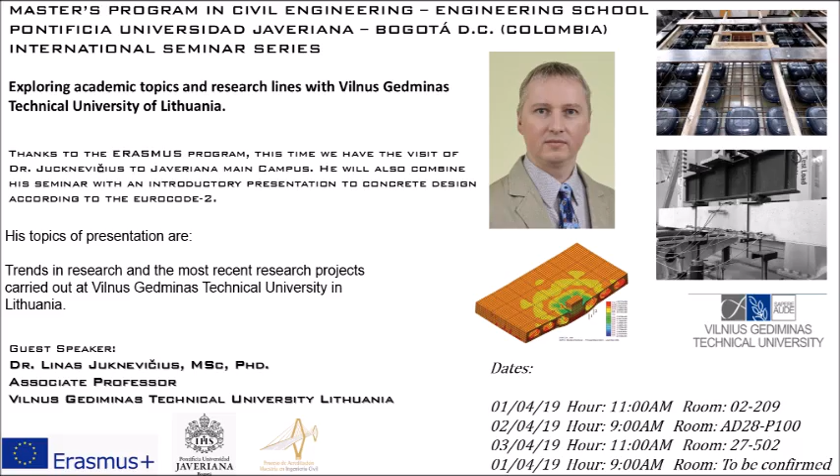It is recording, so you can start whenever you want. Okay, and I can show the information about the faculty, then I can show this. Okay, that's very good, that's very good.

Do you have any presenter or not? I can just click it here. Oh, let me see if it's in the backpack. I think it should be here still, unless Mateo likes to play with it. Maybe it's home, I think it's home. Okay, yeah, he recognizes that thing. Right.

So, shall I start? Yes. We have people online, so I think it's for them right now.

Okay, so well guys, nice to see you. I came from Lithuania, a small country. I will show you later some information about my country, but I also would like to present the faculty, what we are doing there.

Are you the students of civil engineering? Okay, see.

Yes, I know these words, not so much, maybe 10 words in Spanish. Sí, cerveza, baños. Baños, it's so important. It's enough to survive, right.

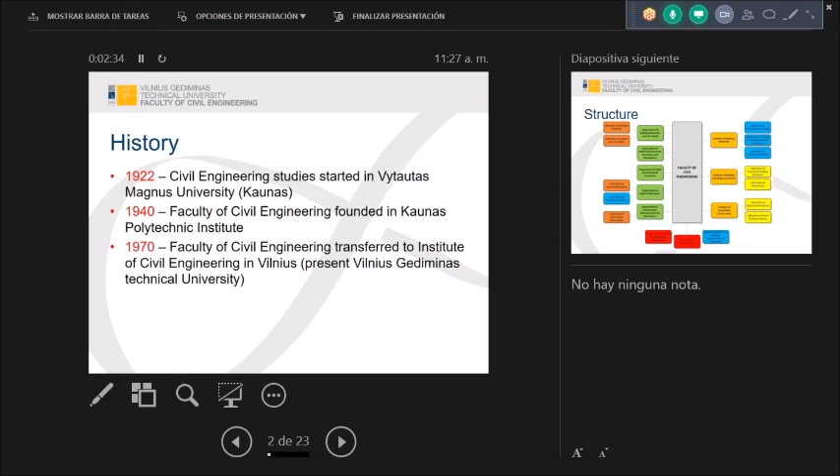Now we do it in another way. Now we have big universities with a wide scope. So for the structure, maybe you can see it there. You don't have to care too much about the internal structure, but this is how we do it in our country. We have university, then we have faculties. We have 10 faculties in the university, and each faculty has a department, a specific department.

In our case, we have department of building materials and fire safety, department of reinforced concrete structures and geotechnics - this is the one I'm representing myself, so I know something about reinforced concrete. Other fields are not so familiar to me. There's the department of steel and composite structures, department of applied mechanics, and construction management and real estate.

So today we have 5 departments working in slightly different fields. And we have some so-called institutes inside the faculty - Institute of Building Materials, Bridge Structures, and Sustainable Construction. These institutes don't have students, they have researchers, so they are pure researchers. They have research laboratories and do pure science.

Do they work directly with industry? Yes, if the industry has any projects or any problem to solve, they address the university, the faculty, according to the field of interest, and then we try to lead them to one of the institutes or departments.

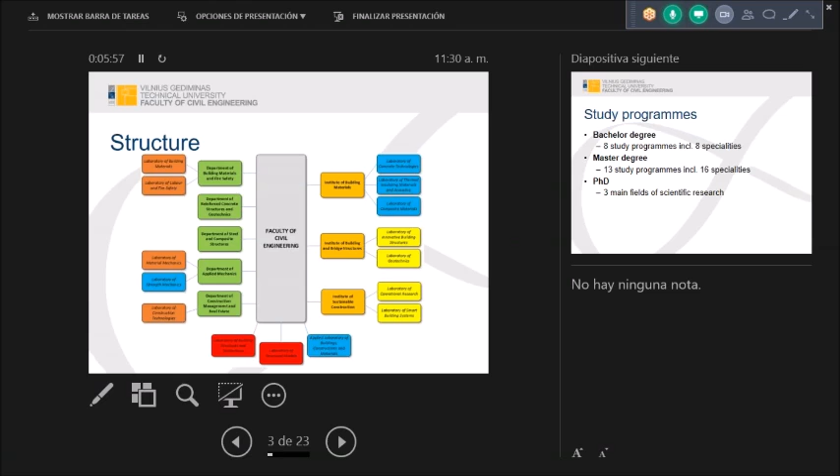Science gets too far away from the problems we have every day.

Yes, exactly. So that's always changing, but generally we have approximately 8 study programs for the bachelor's - this is undergrad - and master's degree, more specific. So I don't know what's your time schedule, but we have 4 years plus 2 years plus 4 years.

It used to be 5 years in the bachelor's, but right now they are doing a change to 4 years, because it's a common trend worldwide to shorten the program into 4 years. I can say we have a problem - there is another trend. In our case, it lasted more than 10 years to have 4 years, and now there is a big push from the industry to make it 3 years.

Really? Yes, but then they said we agreed to make it in 3 years, but then bachelors won't have any right to do any certified work - they have to finish a master as mandatory. So we said that from the point of view of the university, it's impossible to make an engineer in 3 years, no way, that's impossible. We have to have 4 years at least, and this is not a full engineer unless you come to the master. So now it's 6 years, but we agreed to make it 3.5 and 1.5, or 3 plus 2, or any other combination, but we need those 5 years.

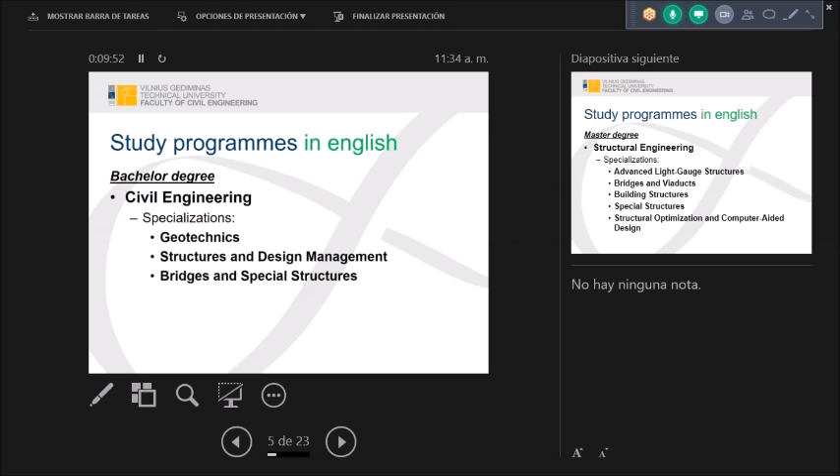Geodesy also, yes. So we are artificially split. Now we become smaller, and I know our bosses in university have a plan to join us together again. So it's a living thing - some bosses think that by changing the structure you can improve things. Personally I don't believe in this - the people can do the change, not the organizational structure. Yes, in every university, yes.

And for the master's, by the way, this is what I'm telling you - it's pure in English, so you are all welcome. If you know the English language, you can come to us and study. So for structural engineering, our core program, it's full in English from day one, all the courses - even the undergrads. Yes, undergrads and postgrads, till the doctoral studies. Wow, so we are really international. Yeah, and we have this full-English undergrad program for more than 15 years now.

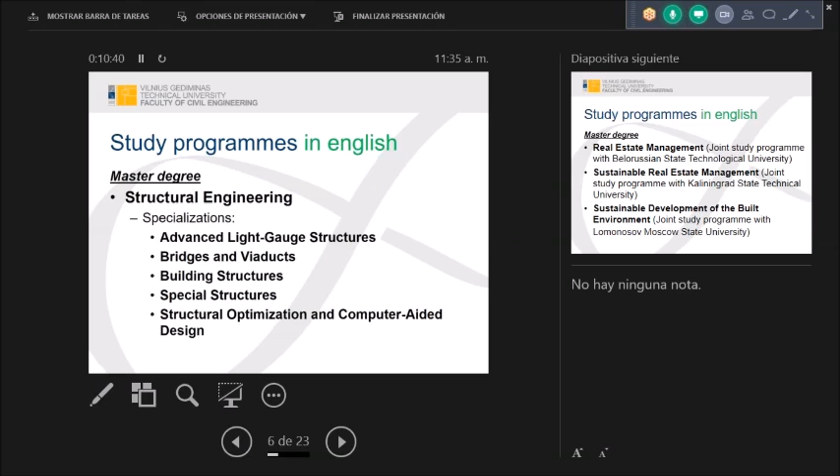Wow. Because we had students from Lebanon and countries like this some time ago - I don't know why, it's very interesting. I mean, that's one of the main problems we have right now with our programs - we cannot really offer more than a couple of courses fully in English.

Yeah, but in our case it's very flexible since we offer a full program, so mobility students or teachers can join almost at any time. Yes, you just have to check whether it's spring or autumn semester. So from the 1st of September till Christmas, or from the 1st of February till June - these are our semesters, so you can join at any time, and they have full English. We also have some programs that join Belarusian and Russian universities.

They are not very popular - we thought we would get more students, but not so. I know about Kaliningrad - yes, this is an exclave. So we don't have any border with Russia, we only have one with this Kaliningrad state.

So that's for the numbers in the faculty. My faculty of civil engineering has approximately 1,000 students for the bachelor's and 400 for the master's, and we usually have approximately 45 PhDs. This is big. For the graduates, more or less, the numbers are decreasing unfortunately, but we still have a big enough body to run our studies.

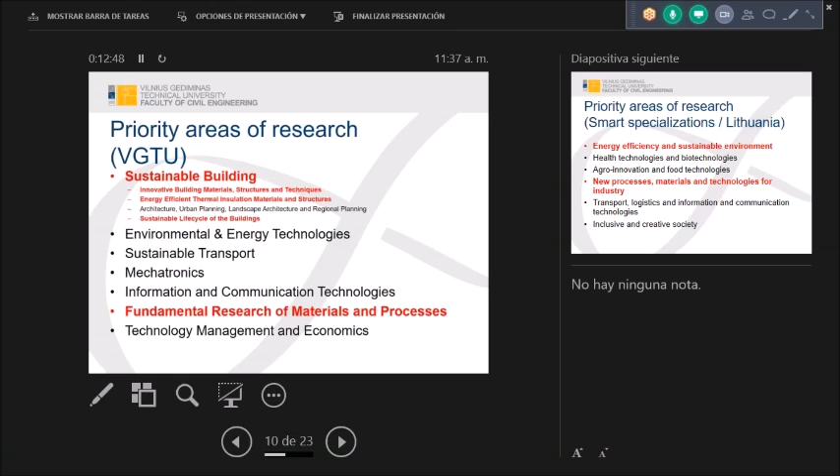Okay, maybe I shouldn't dwell too much on this. Of course, we have some university priority research fields, covering what we call sustainable building, and some fundamental research. Other topics are covered by other bodies. There's also so-called smart specialization - when you want to apply for funds from government institutes, you have to show you're in line with certain priorities. These are set for 5 or 10 years, and then you can get funds. They are quite wide, like energy efficiency - those are the problems we're facing right now. These two are directly related to our field.

What is the main product of production in the agro-industry field in Lithuania? Well, we produce all kinds of corn. Also there is a lot of farming, like cattle, milk, pigs. I'm not very good in this agro-economy, but I know these are the national products - we have potatoes, corn. I don't know the English names of all those things.

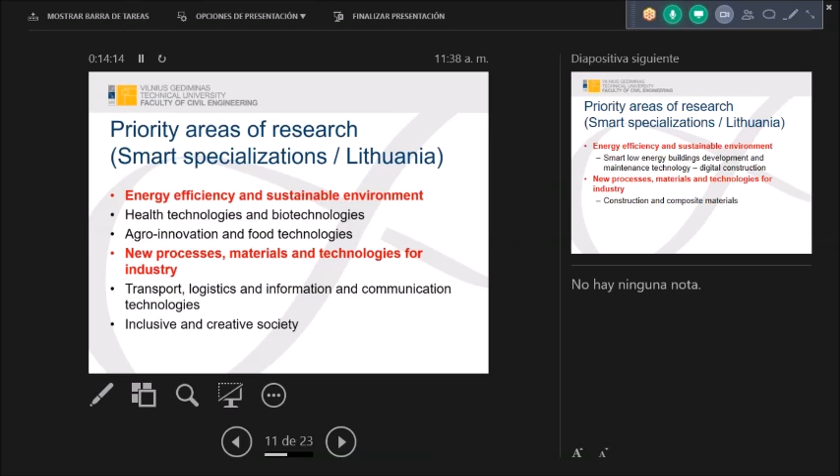It's all right, it's very similar to what we have - pretty much the same. Carrots, and we have a little bit of rice. We don't have rice. Okay, so that's what we are importing - we're a small country, so we import most things. There's just a continuous list.

This is a European program, a big one. It's almost impossible to do it alone, so we have to collaborate - this is the reason why we try to be so international. If you want to apply for projects like Horizon 2020, this European funding, it's again very general, but you have to find specific calls for the project and apply. These projects are millions of euros each. You have to be big enough by yourself, or get partners like Cambridge University or other big universities - then you can become a partner, so it's not easy to take the lead.

Because we are just too small - our turnover is something like 50 million euros for the whole university, so it's considered too small a number to run a project worth 10 million euros. They said we don't have enough management capacity and experience, so you have to find the big guy who takes most of the money. Still, it's a lot of money - those projects are very interesting.

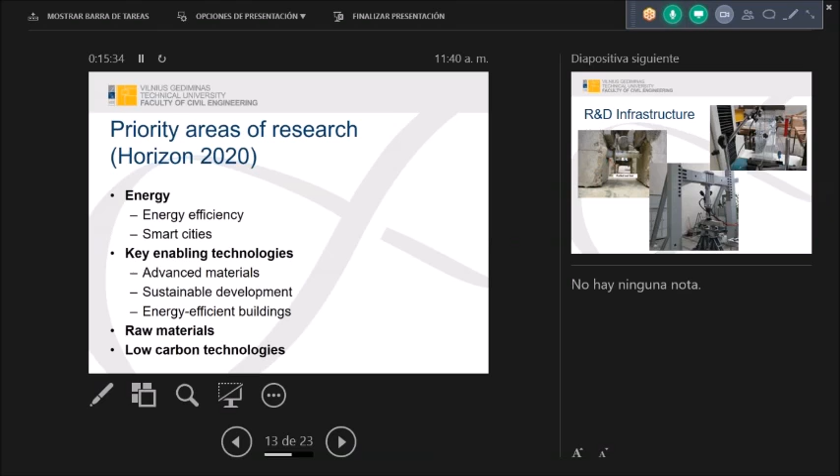And just some pictures from our laboratories - this, by the way, is one of the non-metallic reinforcements. We do a lot of tests, like pulling and so on. This is now our main beam test setup - this is a universal machine, we can do any setup, I showed a lot of features.

I can show it also today, with the testing of the slabs - this is the sleeper test, I showed it two days ago so I'll just show it now, that's for train tracks. So they are really universal, they can apply static and dynamic loads, and they are fully computer controlled. We have horizontal actuators so they can test structures up to, I think, 20 meters - that's a long span, a very long span. They can test real size, real scale specimens.

That over there, is that glass? Yes, that's glass, because we have one department for steel and composite structures. They work with timber and glass and all the glued things. Very interesting.

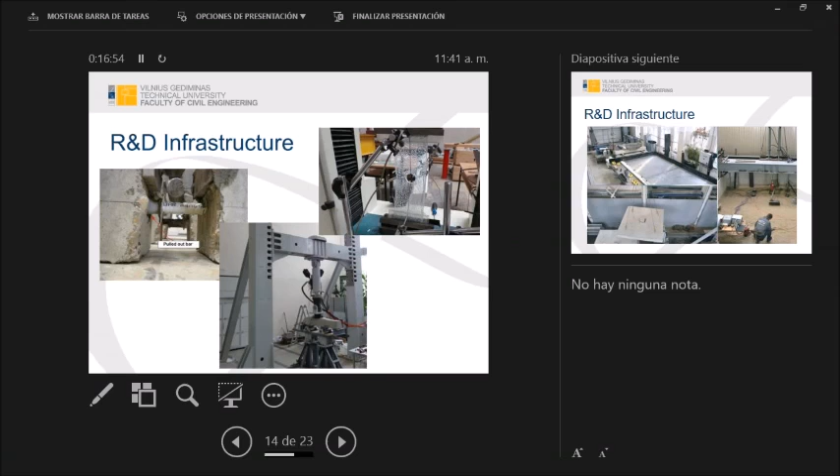Structural glass has become very popular as a structural material. Now we sometimes make facades where the glass itself is structural. It has a load-bearing capacity instead of just hanging there. That's another picture.

So we have two big fields, like playgrounds, one to prepare the specimens. We have a huge formwork with a magnetic formwork system. So as a scientist, you can make a drawing for the slab or beam of whatever sizes, and you can do it.

Here is a vibrating table, so you can put the reinforcement and make real scale big slabs or big beams for testing. I don't know the exact dimensions, but it's something like 8 meters by 4 meters for the big one.

So we have an industry-level laboratory. We have one big building, like a factory, which was built exactly for the laboratory's purpose. So that's the slab area, and we have a crane so we can move things around the laboratories. And this is the geotechnical lab, also very nice infrastructure.

They have a test playground for the foundations, I think 8 meters deep, so they can control the water levels and pressure at different depths.

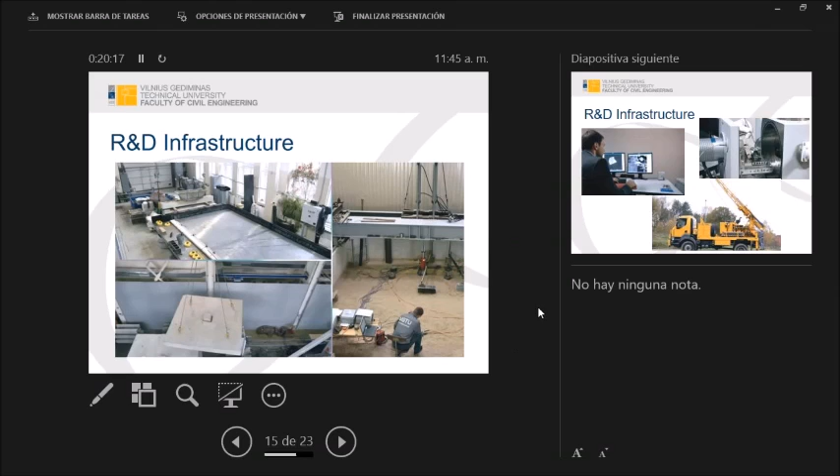That's right. Sorry, I passed over something again on the other topic. Yeah, it's ready. So we can actually work from the macro scale to the very micro scale.

We have an electronic microscope, so we can check all the properties of the soil by analyzing the small grains and how they work together. We also have testing machines that drill the test samples. That's unique, there are all kinds of infrastructure available.

Related to civil engineering, because we had a major investment some time ago, 7 or 8 years back. We got a big project sponsored by the European Union, so we invested almost 10 million euros just to buy the best new equipment available worldwide.

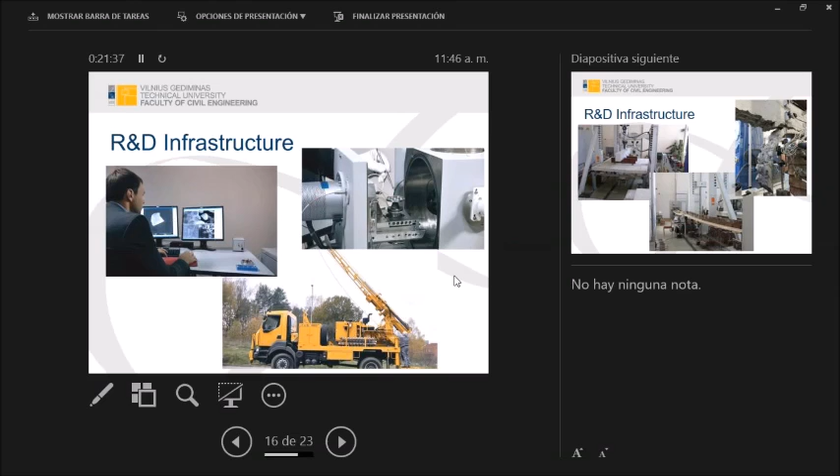So far we're very good, of course, but we have other problems. We don't have enough running costs. This machinery costs money to maintain, and I don't know what will happen in the next 10 or 20 years, because the maintenance and even the accreditation testing to prove the machines show the right numbers costs thousands of euros every year. Well, but we hope to manage it.

That's another picture, some tests of the cables for supported bridges, and you see this external reinforcement, fiber-reinforced plates that are attached to the slab. So this is just a picture showing what we do with our infrastructure.

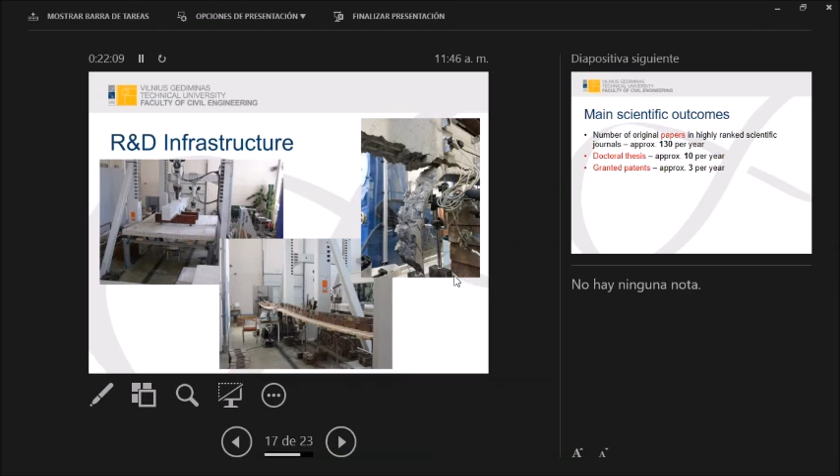Very shortly, we produce a lot of papers, because even our salary depends on the papers. If you want extra, there are about 3 patents per year, mostly national patents.

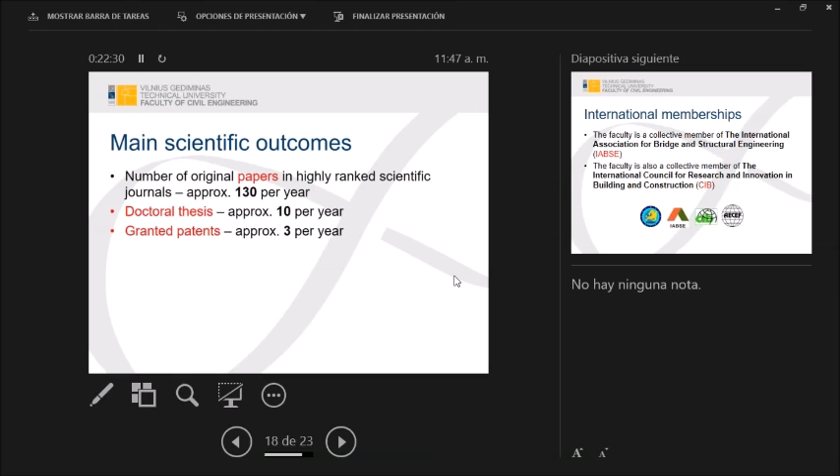So for the patents, I have a special opinion. Unless the patent is bought by a company, they are worthless. You just have to pay for it, so I don't like it.

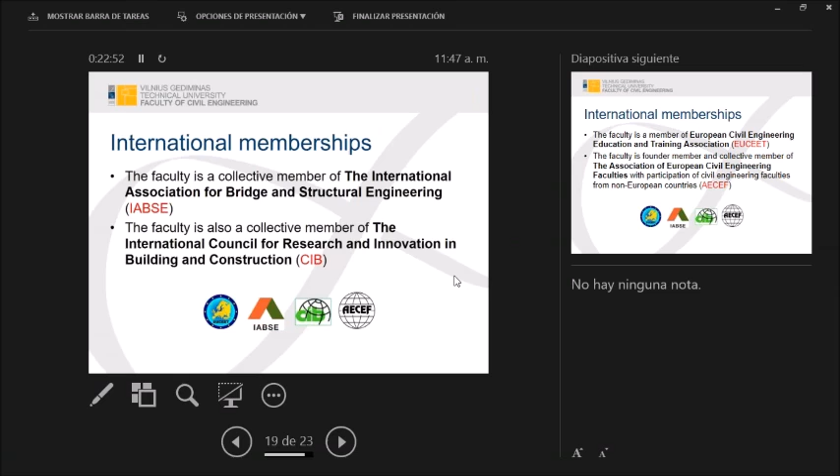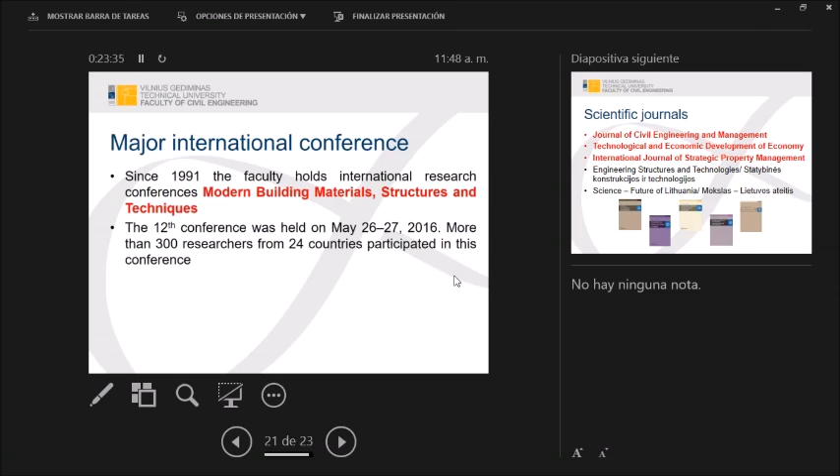We have one big international conference, and one of them will be held in 2 months. I'm responsible for this conference, so you are very welcome to come. It's held every 3 years, so in the next 3 years, if nothing changes, we will organize it again.

We also have scientific journals, and three of them are listed in the Web of Science database, so they are very popular there. My personal opinion, which is not so popular, is that scientists write a lot of papers now, but nobody reads them. That's a problem.

Okay, thanks for this presentation on the faculty. Professor, the room is yours, you can do as much as you want. So just tell me when I have to stop. We have 10 minutes still, Professor. No worries.

Well, I'm impressed by the 3-year span they are trying to do on the undergrad level courses and programs. We try to resist it, we're trying to resist it, but I don't know if we will succeed. Okay, let me do this. This is new, show me how to do this. Okay, that's new, I didn't know it. Maybe it's a duplicate.

Excuse me, I have a question. Yes, of course, you can stop me at any time and ask the question. In Lithuania, what is the portion of the faculty, how many faculties are in different cities of Lithuania?

Usually we compare universities. We have several universities in Lithuania, and there are only two universities with civil engineering or similar faculty. We consider ourselves the best in the country, though maybe the other guys think differently, but according to international rankings, we are the best, at least in the country. There is more than one faculty, and more similar universities in Lithuania, but not too many. We have 14 universities total in Lithuania, but we're a very small country. The faculties working with civil engineering, there's two directly in civil engineering, mine and our competing university, Kaunas Technical University, and another smaller one. So the highest concentration of civil engineers is in Vilnius, the capital city.

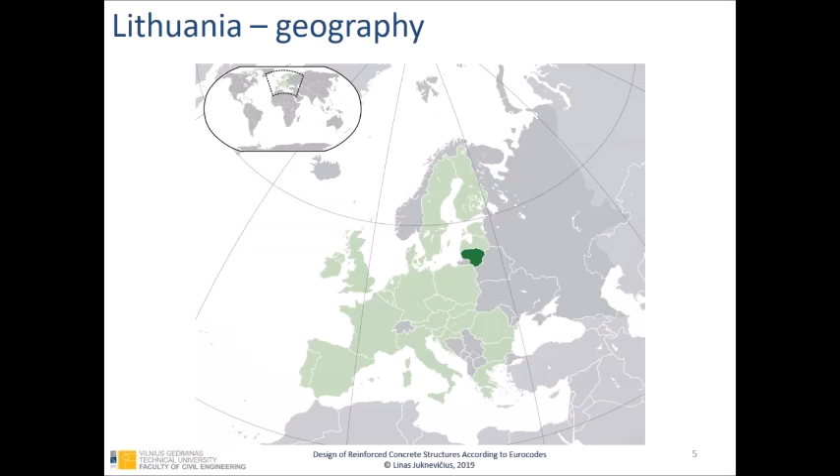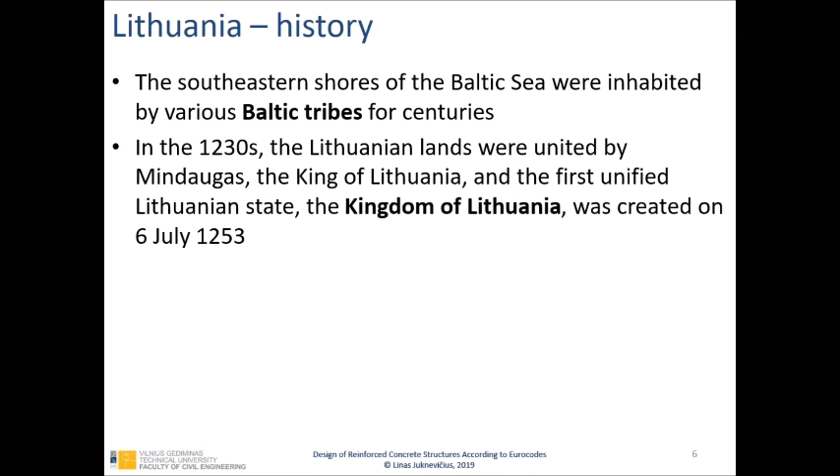That's very interesting. For the history, since we don't have much time, I'll just say it shortly. We are quite an ancient country, lived as tribes, as pagans in the north, far away from the Christians, and then we were Christianized by force, like you, around the 14th century, mostly by Germans, and we were a very big country. Some time ago, this big piece was the Lithuanian Grand Duchy. Long time ago, that was the biggest country in Europe.

But now... What time, in which year was that?

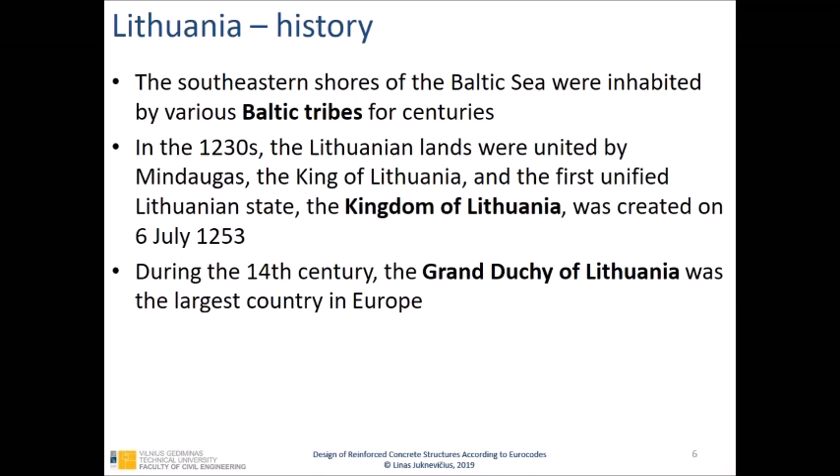That was in the 14th century. Long time ago.

Then we made a Lithuanian-Polish Commonwealth. It joined Poland, a big country. There was also some Ukraine, Belarus, some smaller countries. We bordered Russia, Austria, and Turks. We mainly fought with Turks and with Swedes, and the Swedes, Vikings approached us, along with the Russians and the Turks.

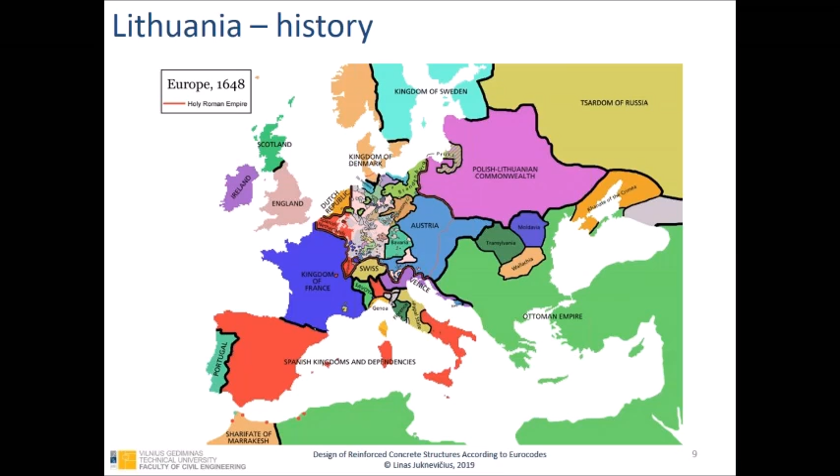We tried to fight, but we were considered one of the most important countries at that time to stop the Turks, the Muslims, from entering Europe. So we were at the border, but then you're not so happy to be at the border - you have to fight all the time. So the Lithuanians fought constantly, no peace at all, unfortunately.

So luckily, since then, we are again an independent country. We are very small, but independent with our own culture, our own language, and stuff like that. Now we are members of the European Union and full members of NATO, so we are very happy about this.

Yes, so they are protecting us from Russia. Yes, they have power.

And our economy is growing very fast now. We are not as rich as Germany or France, but maybe we are something like half as rich. So we are moving towards the first world, let's say.

That's not important. President, Prime Minister, and Parliament, the usual system. At least in Europe, we don't have a king. We had a king many years ago, 800 years ago, but now we don't have any king, so we are just a republic like Colombia.

The only two countries in Europe with a kingdom are the UK and the Netherlands, maybe Spain. No, Spain and Denmark and Sweden, lots of them. But those kingdoms are more representative, not very political - they don't have political power.

So we are just less than 3 million people, with the same density of population as Colombia. The language is Lithuanian, and there is an 8-hour time difference between Colombia and Lithuania.

We have 8 hours difference. Professor, for such a small country, the GDP is gigantic compared to what we have in Latin America. My God, I mean that's...

But then we became members of the European Union, we have very big support from funds. Before that, the numbers were very different. The only country in Latin America that can try to do something like that is Brazil, but that's because of the petroleum and all the resources they have. So we don't have any resources, unfortunately - our resource is the brain.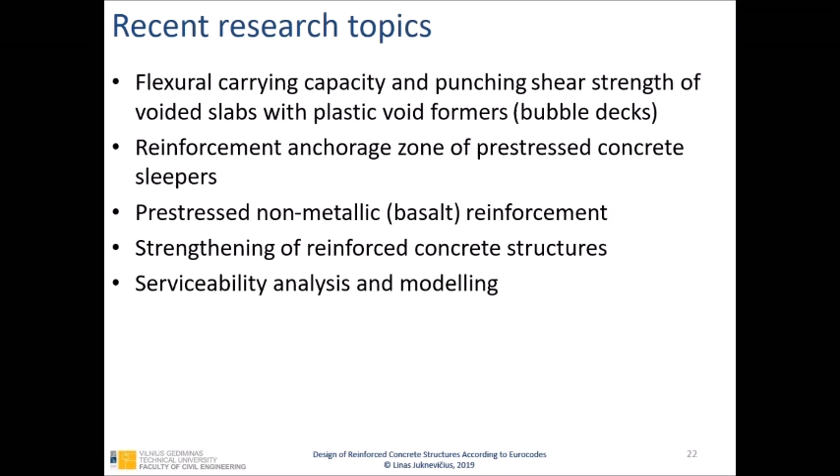There's also a lot of theoretical research ongoing, there are people creating very sophisticated models for the calculations of the behavior of reinforced concrete.

So for the bubble decks, I can skip this part and just go to the pictures. You see, this is the kind where we have bubbles made from plastic waste. So they are solving more than two problems at once for

sustainability. First, we use the plastic waste. Then we form the bubbles, which reduce the total volume of the concrete used for the slab by almost 40%.

And then the self weight is decreased. So you can also decrease the dimensions of other structures like columns and foundations.

These are one of the recent investigations we did in the department. There is one company involved who tried to enter the market with these kinds of slabs.

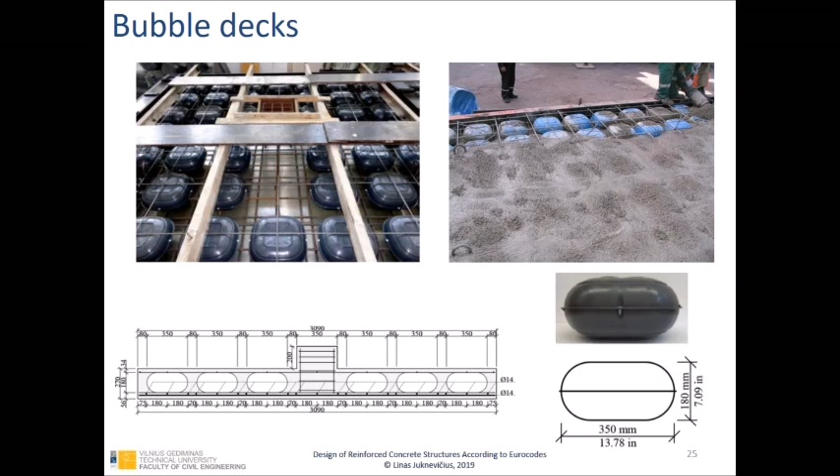So these are load-bearing slabs, normal slabs like we have here and here. So we just have to make an investigation to see if they are good enough to be structural members.

You see, different setups were tested, and what problem we had was about the punching shear. We had a column and the slab which tries to be punched.

And we are particularly interested in this area. Can we make it all full of bubbles, or should we make like a cross of solid concrete, or should we make some area of solid concrete to avoid this contact zone between the column and the slab?

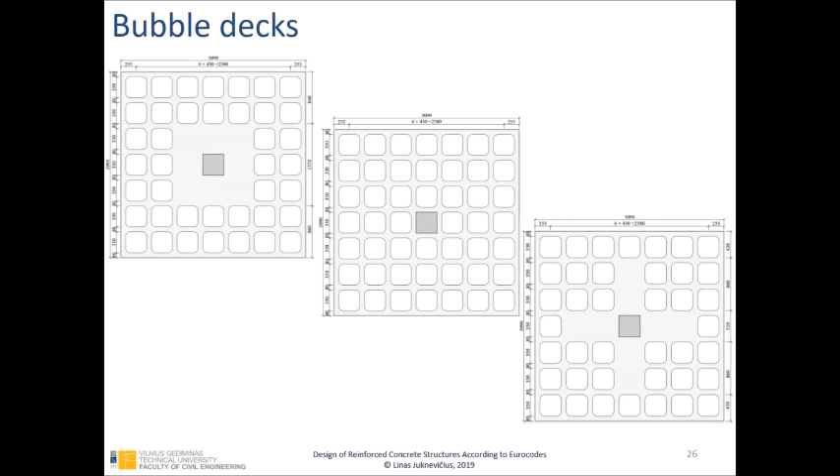So there was a lot of investigation. You have this test setup here, this is like a column, and the slab is made of bubbles of a different type.

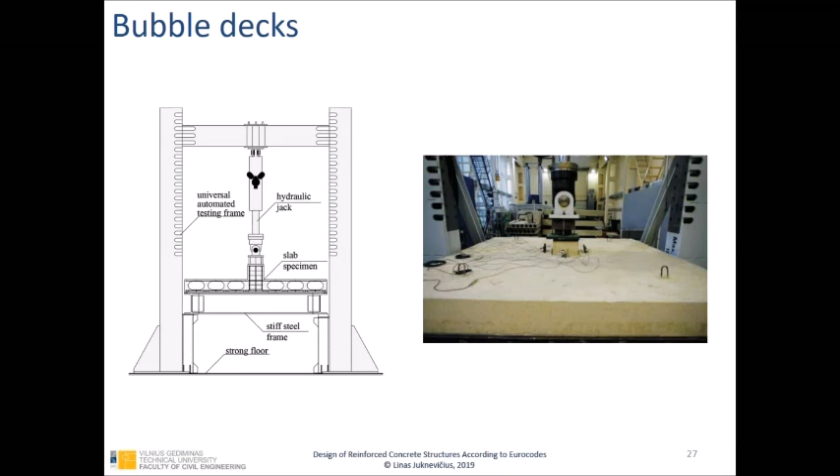So the main goal of these tests was to find out which is the optimal solution: full of bubbles, a little bit more solid concrete, or cross-type concrete.

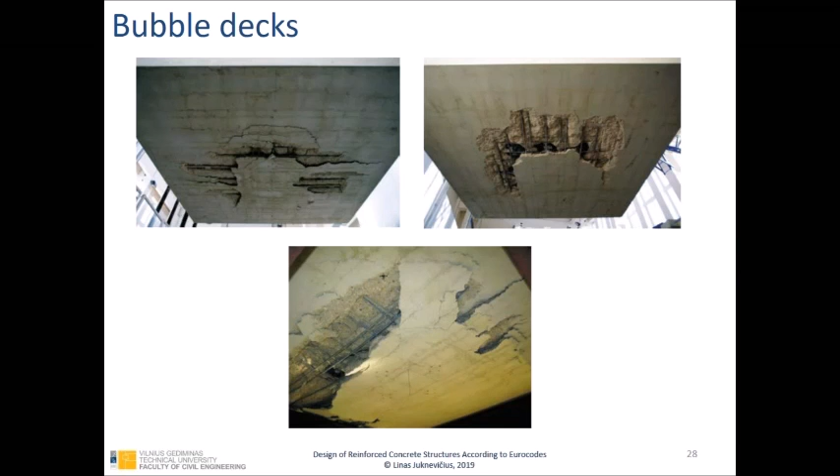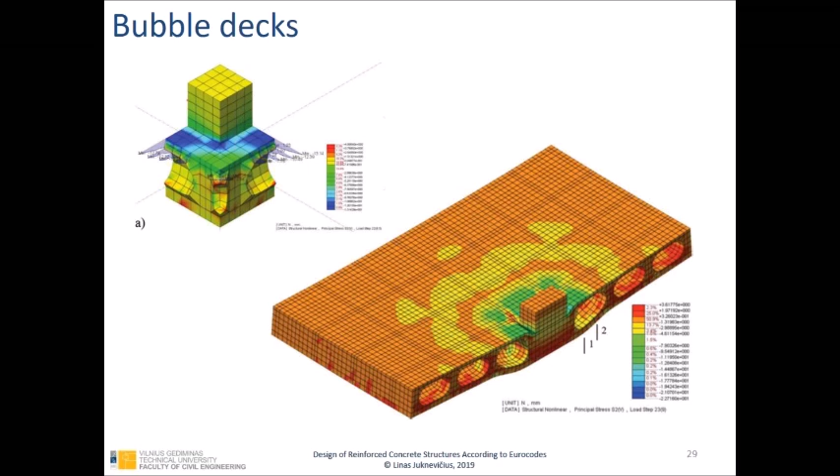There were also numerical investigations we've done, and after the numerical investigations they were tested at real scale in the lab.

There is another solution in case you can't manage it with the bubbles by playing with a different pattern of them. We can use additional reinforcing steel to reinforce this contact zone.

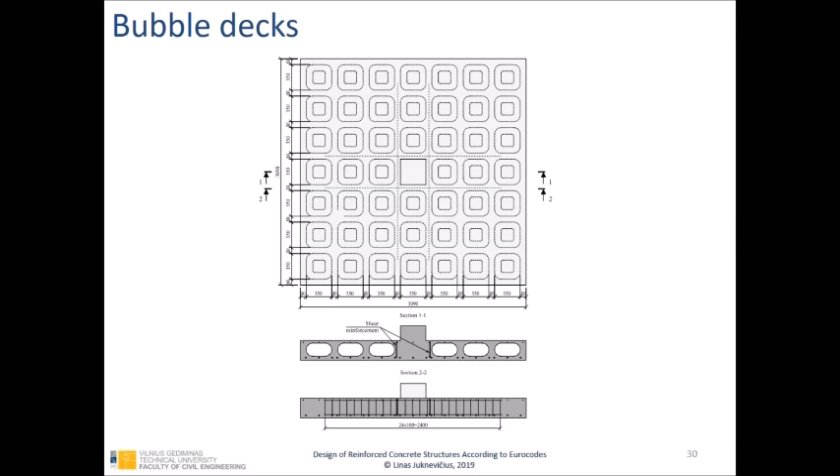There are more pictures. The bubbles themselves were also investigated a lot. We tried to make different kinds of bubbles because the bubbles should have good enough support for the reinforcement. You know that the workers should walk on it, and it should not be damaged because of it.

We do construction like that, but it's made of bamboo. And we have that problem you're mentioning, because when workers are walking on top they just go through it and make a gigantic hole, and then when they're pouring the concrete goes in. That's a way you never accounted for.

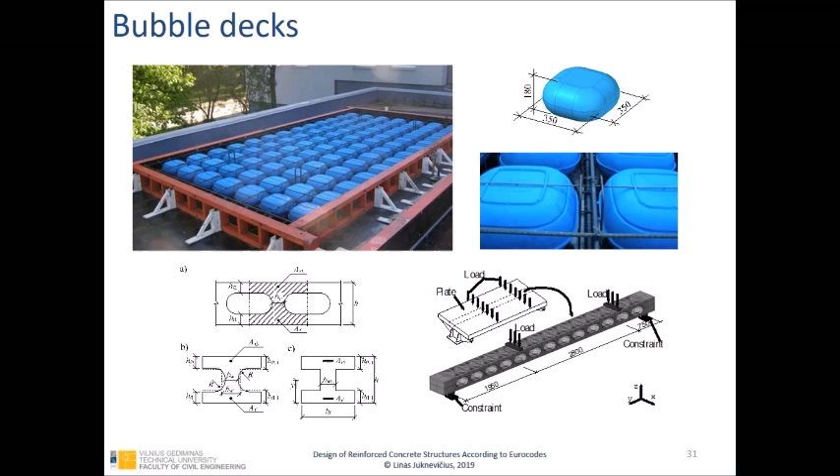So what they did, I think, was a special holding of the reinforcement which holds the bubble in place when you pour the concrete and vibrate it. It's also safe to walk on. So they have these strengthening grips, and the bubble itself becomes the structural member.

That's another test setup, with a lot of measurements of the cracking zone, the shear cracking, and so on.

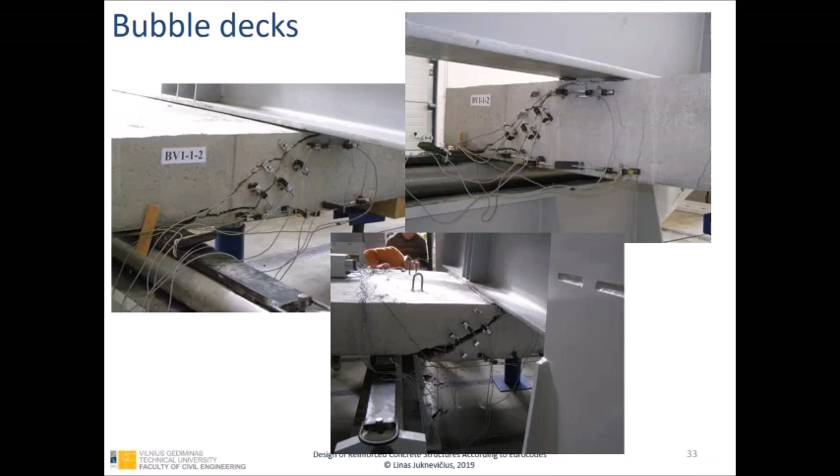And for the sleepers, the ones which hold the railways, it's a very expensive thing because it's a simple beam, pre-stressed sleeper to hold the railway, but there are hundreds of thousands of them along the railway, and it's very costly to change them. You have to stop the railway, remove the rails, and redo the ground.

Enormous prices. So the railway company said that if you do the research and can save the concrete and make the service life longer by a year or so, it's millions for us.

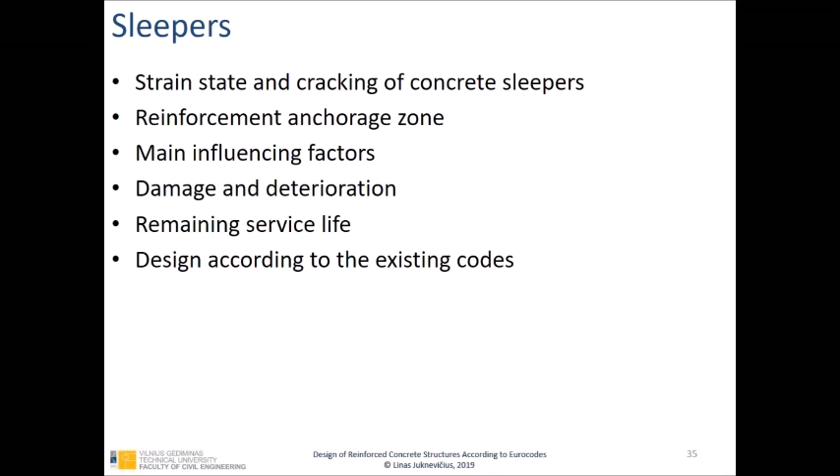So they paid quite a lot of money for the investigation. This is half of the sleeper, where the railway is supposed to be supported. We investigated the deterioration caused by all the chemical products you can find in the railways.

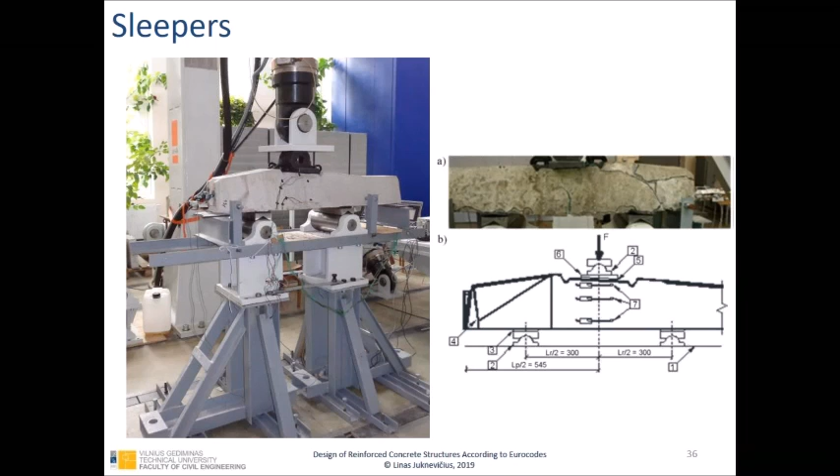We have another problem in Northern Europe: the freezing-thawing cycles. You have a micro crack, and then water penetrates the crack. When it freezes, the water expands, and through this cycle of freezing and thawing, the cracks get bigger and bigger.

There is some testing here. They tested the penetration of water and chemicals, and so on. This is a picture of this one - new. This is used for 1 year, I guess. This one is used for 3 years, so you see a lot of damage.

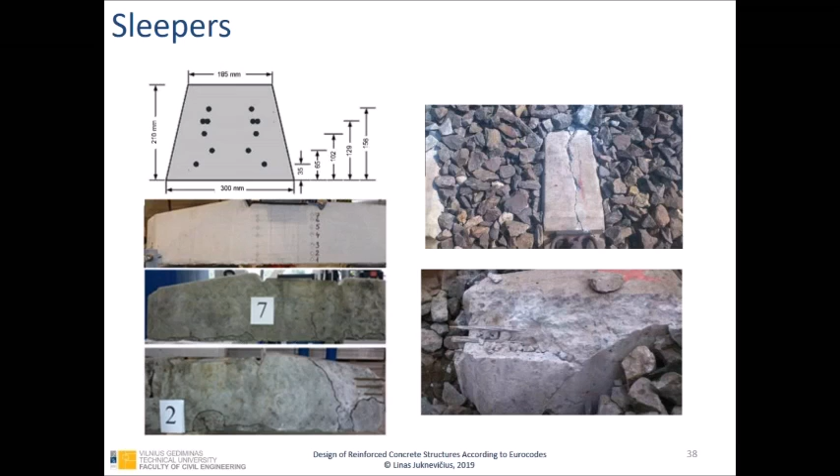For the anchorage zone, this reinforcement is pre-stressed, so the loss of anchorage is little. But in this other case, you are losing it completely. Okay, and that's the modeling.

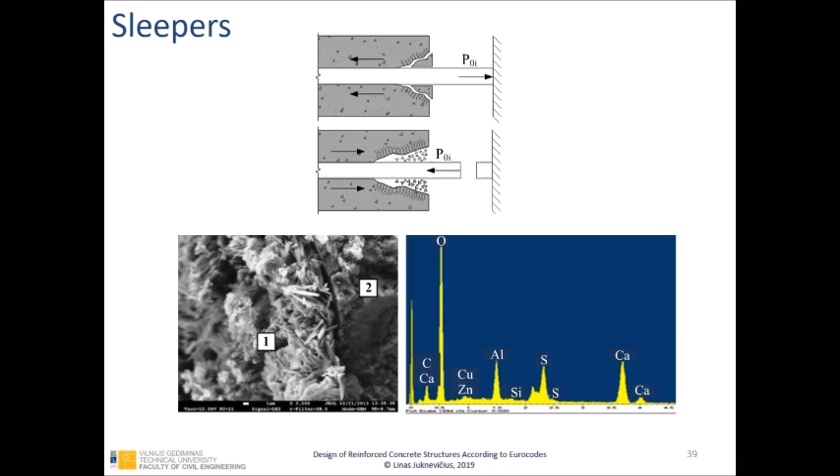As I said, we're doing the real scale test, but also sometimes we go to the microscopic scale. We analyze this contact between steel and concrete in detail to see what kind of products are there. So now we know what caused the problem of losing the anchorage zone by analyzing the chemical composition.

And for the non-metallic reinforcement, in this case, this is basalt fiber reinforced polymer, but there could be many others - carbon fibers, glass fibers, aramid fibers, all kinds of polymers you can find.

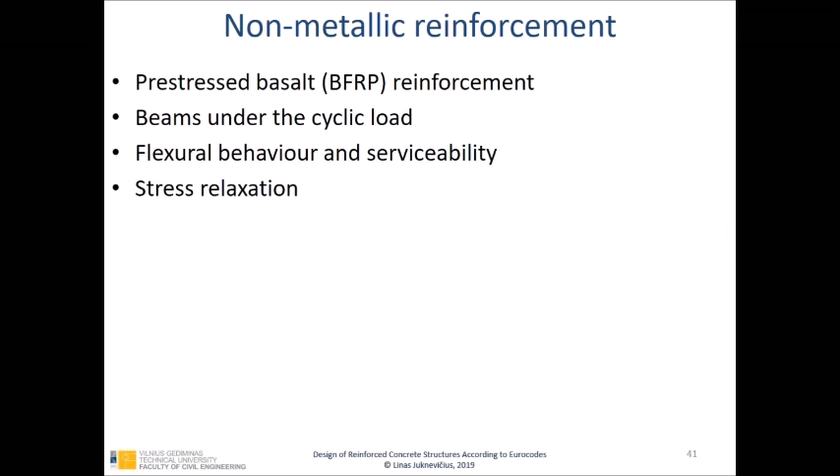We try to make the tests with a pre-stressed non-metallic reinforcement. This is not very usual, but we found out that for cyclic loads in structures, this reinforcement is not performing very well - you should pre-stress it. But then you have another problem, so we investigated that with different anchorage and different pre-stressing levels.

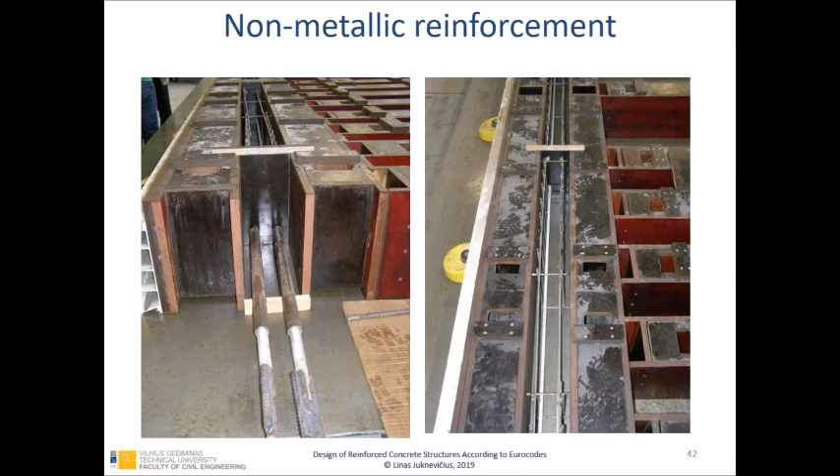So that's the beam, this is the reinforcement, these are the anchors, and then you have to grab and pull it to pre-stress it before pouring the concrete. Then in testing the reinforcement itself, this basalt reinforcement looks like this.

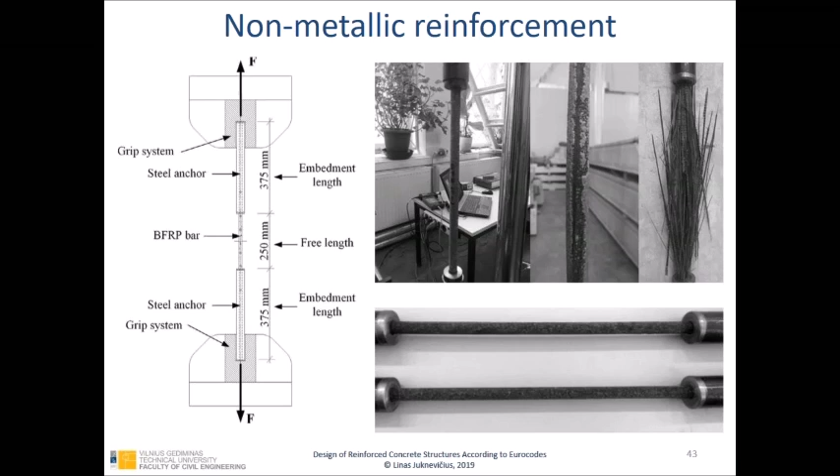It's specially made with a rough surface to get better connection bond. So we try to make the pull test - pulling it out of concrete - and also testing the beams themselves with this pre-stressed reinforcement at different pre-stress levels. We're testing lots of specimens and getting different failure characteristics, checking all the cracks.

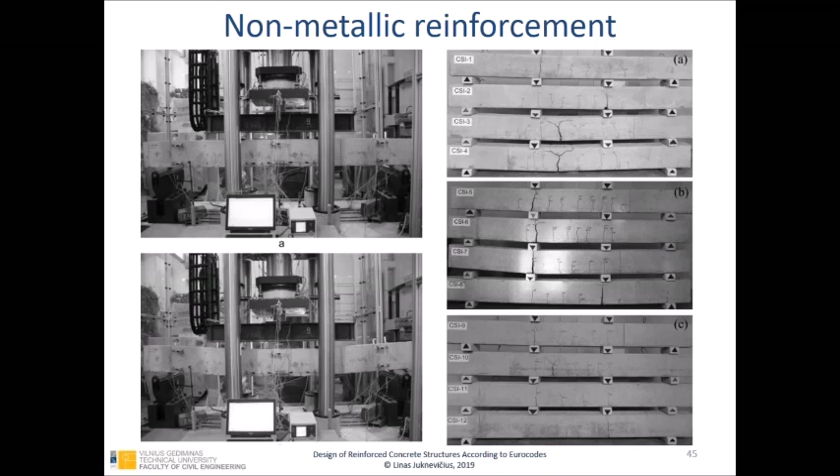That's my field. My PhD thesis was based on the flexural members, and I investigated these cracks. So maybe not so interesting, but that's my job.

But I'm finished, so mostly there are - and you don't have to worry. I will send all of the slides to Professor Federico so he can share them with you. Because I moved very quickly and have many slides, I will share all of it in a handout form, so you can read it later anytime you want.